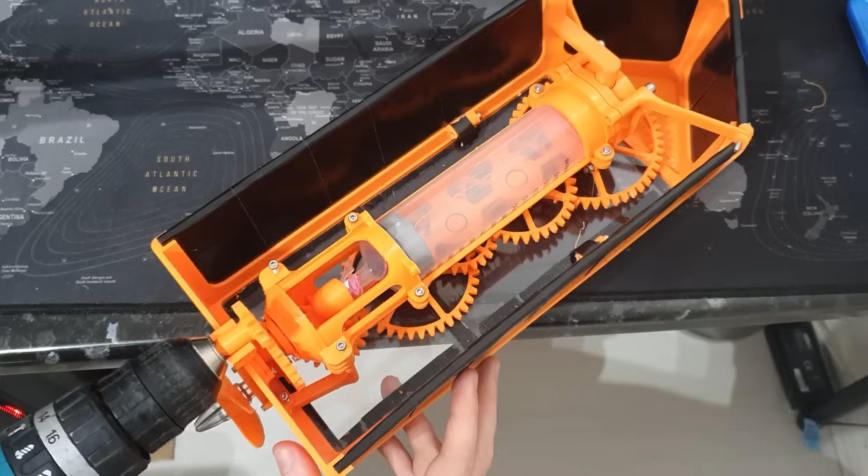It essentially worked by plugging the end of a syringe and winding back the piston inside the syringe using a gear mechanism, thus creating a vacuum. The difference in pressure between the inside of the syringe and the atmosphere results in an imbalance of forces on the piston, so atmospheric pressure forces the piston back into the syringe once you release the mechanism. This energy is then harnessed to spin a small propeller and push along a boat.

You may be thinking to yourself, atmospheric pressure isn't that high. How much force could it actually deliver? Imagine you laid flat on a table and a vacuum pump sucked you to the table. We can quickly work out how much force you would need to overcome. Force equals pressure times area. We know that atmospheric pressure is 1 atmosphere, so we just need a rough approximation of the surface area of the human body.

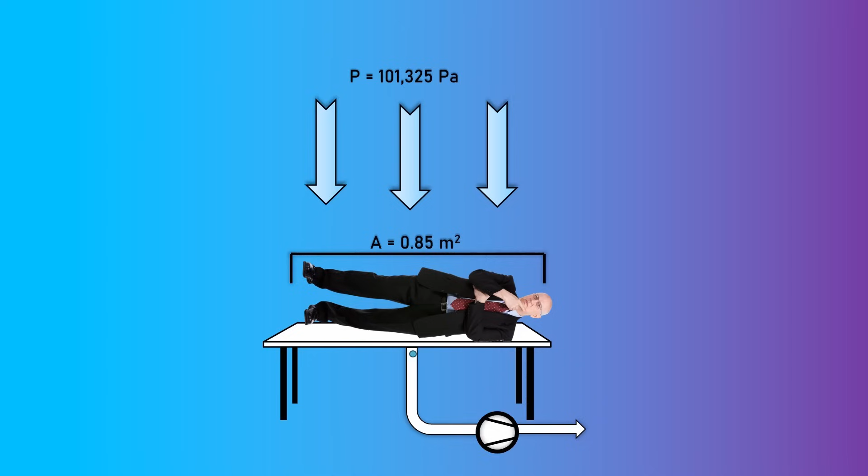So when we do the calculation, that gives us a force of roughly 86,126 newtons. Here on Earth, that would feel like 8,800 kilos, or the equivalent of roughly 6 hippos, or just one of your mother. Using these same principles, we can roughly work out how much force is required to pull back a piston of a certain diameter.

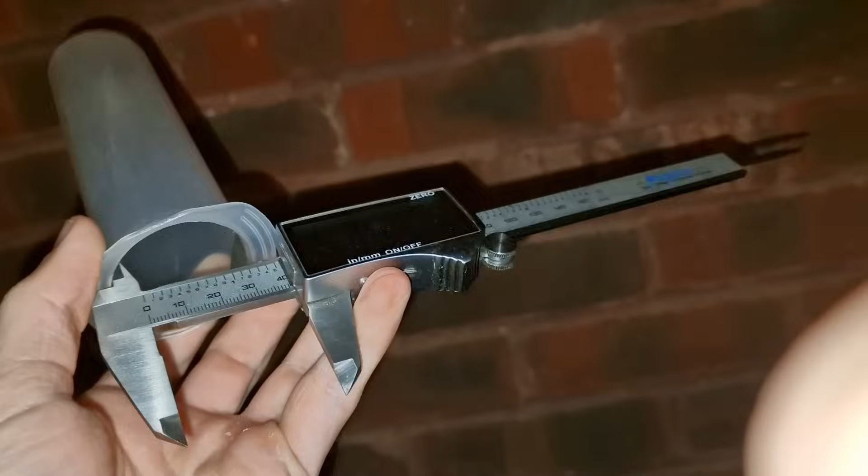This syringe has an internal diameter of roughly 4 centimeters, and therefore will require roughly 12.3 kilos of force in order to pull it back.

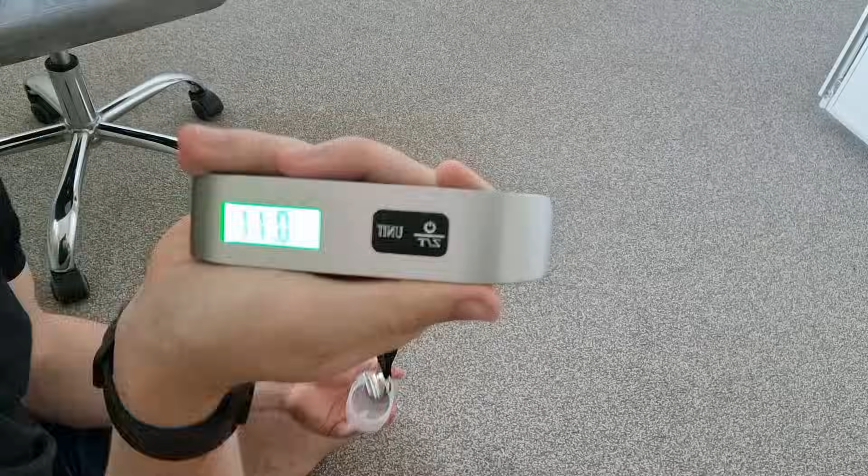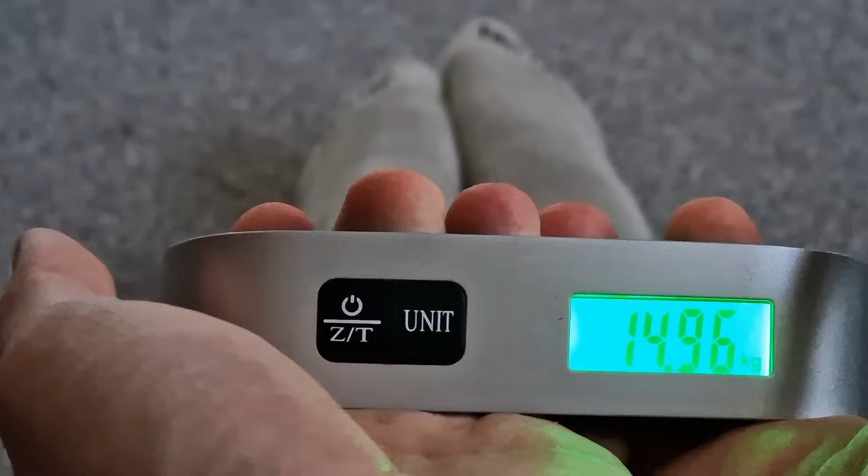I wanted to see how close this calculated value was to the actual value I'd see with the syringe, so I carried out a simple test using a luggage scale. And just to be on the safe side, I had Nala supervise. Safety is number one priority. So it comes out at just over 14 kilos, which isn't far off the calculated value. I think the main reason for the difference is the increased friction with the rubber seal on the syringe.

My first boat was powered by one of these syringes, which, in principle, did work. I think it's fair to say there were a few design flaws, and thankfully, a few of you were kind enough to point them out in the comments of the previous video. So, in this video, I'm hoping to address most of these concerns.

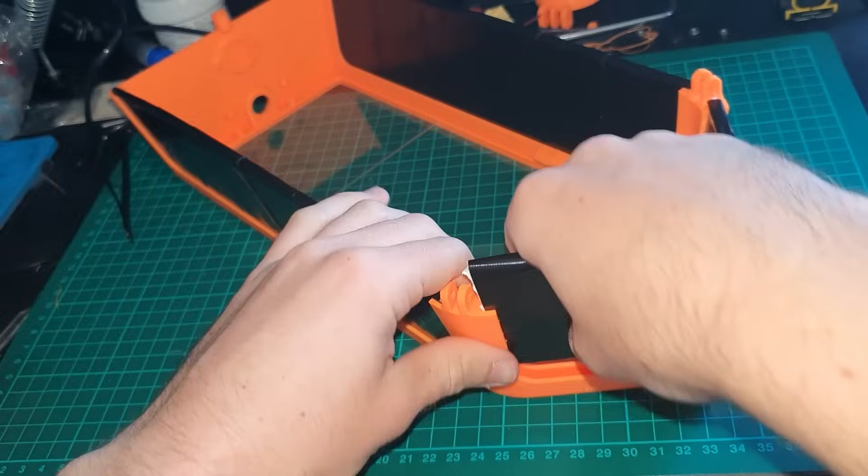The shape of the boat is not ideal. With this big, flat bottom, it's basically a barge, not a boat. So I've completely redesigned the hull so that it now actually looks like a boat.

Half of the propeller was out of the water, so the boat just spun in a circle. I've since learned this is called prop walk. This basically means the rotation of the propeller creates a paddle wheel effect, which causes the boat to turn to one side. The redesign of the boat hull was aimed to solve this problem, and I put the propeller shaft as low down in the hull as possible to make sure that it stays fully submerged in the water.

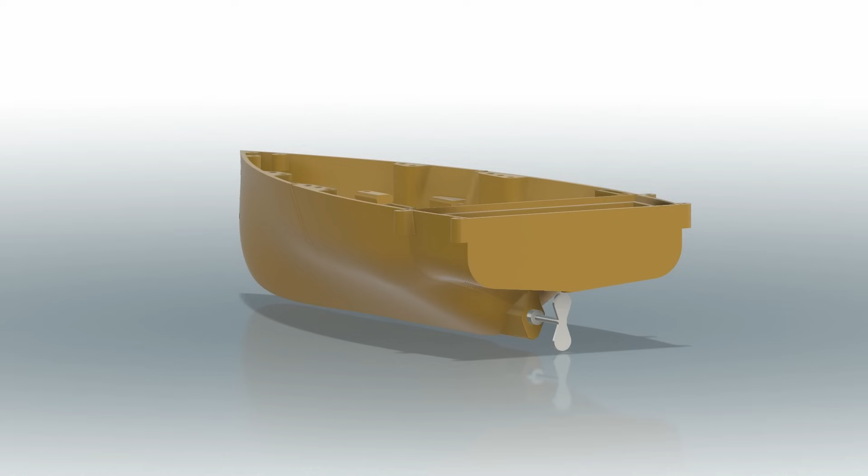There was one other thing that a few people mentioned. I'm just trying to remind myself of what it was. Install a rudder, put a rudder on, put a rudder on, put a rudder on it, put a rudder on it. So I'm going to put a rudder on it so that I can control the direction in which the boat is going.

Now, not having a rudder was an intentional decision, as I just wanted to make a simple boat without the complexities of having any electronics on it. And honestly, in my ignorance, I wasn't expecting it to basically be a merry-go-round.

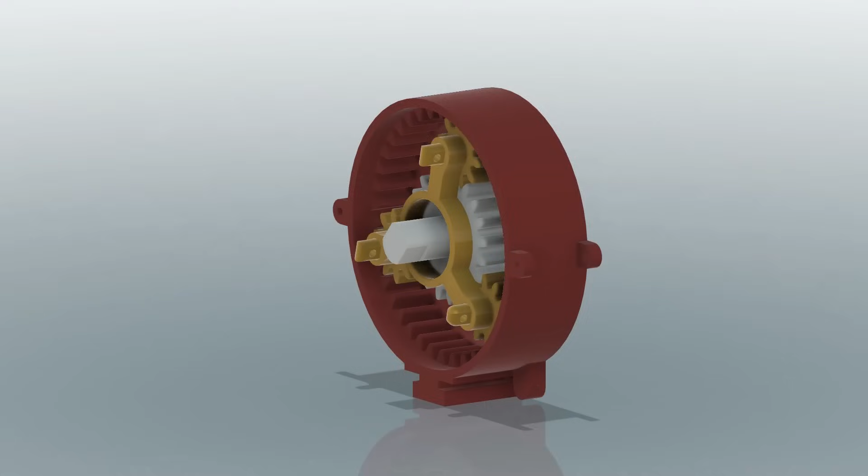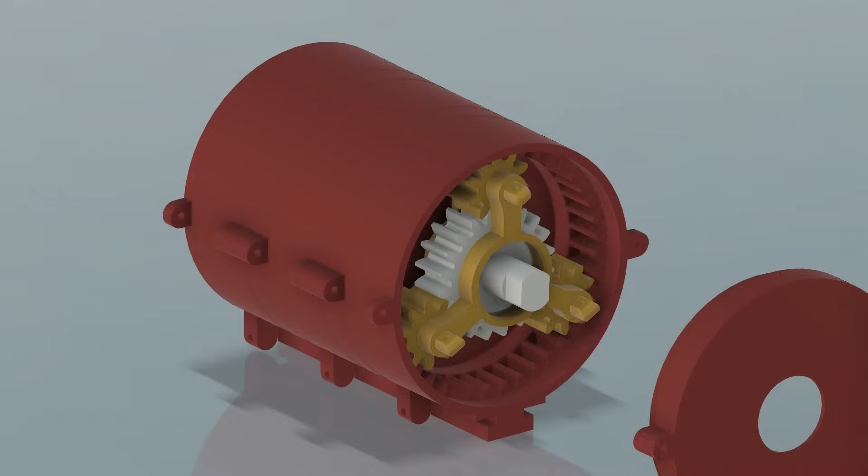I've made some other improvements too. At least, I think they are. I'm now using a planetary gearbox instead of whatever the hell you want to call this. The benefit of using this planetary gearbox system is that I've designed it in a modular fashion so that I can add or remove segments to change the gear ratio depending on if I want more power or more range. This mechanism is going to potentially have more torque than the last one, so I'm hoping the extra tooth contact area is going to reduce the chance of something breaking. It probably won't, but we'll see.

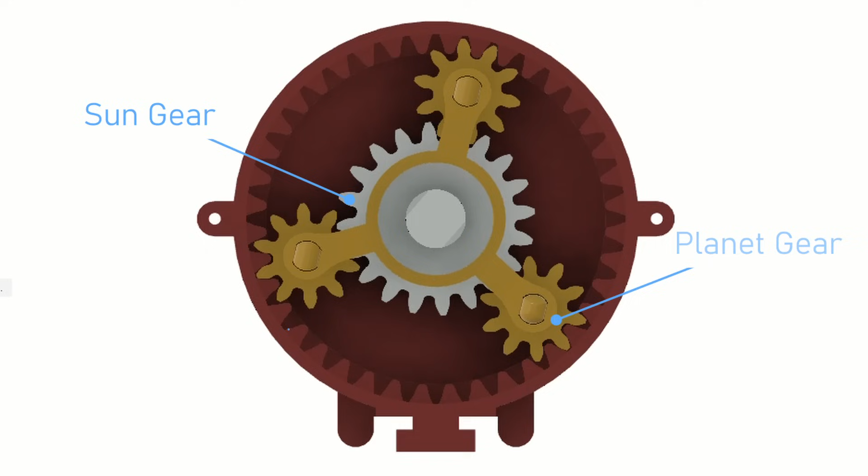In simple terms, a planetary gearbox is made up of a sun gear, planet gears, and a ring gear. The planet gears revolve around the central sun gear, with each of the planet gears connected by a carrier, and the outer ring gear is fixed in place. The math behind determining the gear ratio is slightly more complex than for standard spur gears, but basically you can just use this formula. In this gearbox, every time the planetary gear carrier rotates 1 time, the sun gear will rotate 3 times, giving it a gear ratio of 1:3.

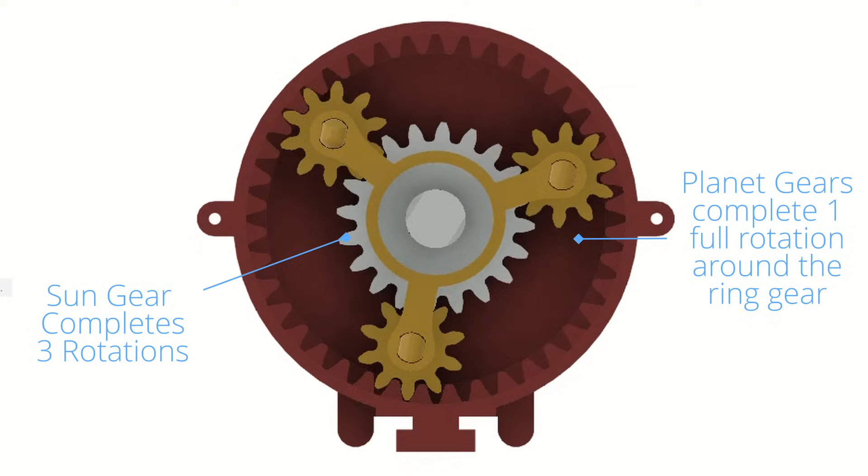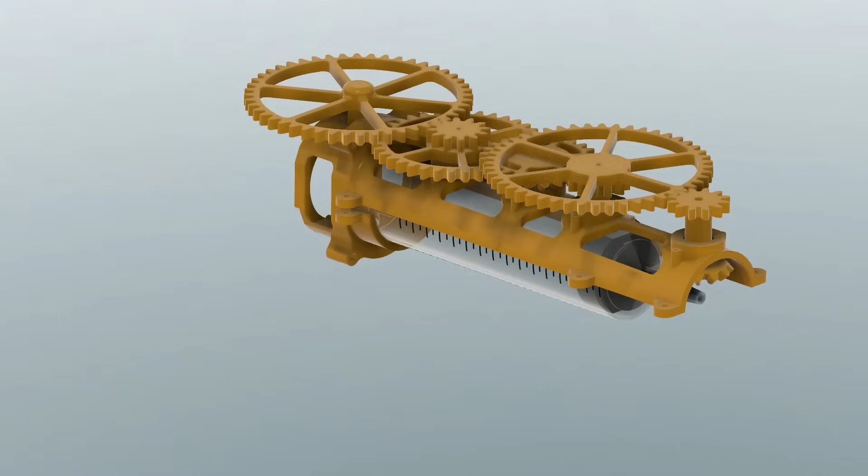By connecting these together in series, I can get quite a large gear ratio pretty quickly, meaning for a small movement of the piston, I get a lot of rotation at the propeller, hopefully giving the boat good range. Though I can see a potential issue from increased friction due to the greater gear contact area. There also may be an issue with the center of mass being too high on the boat, as due to the size of the planetary gearbox, I had to mount it at the top.

Now, my favourite part of the process: spending an entire week printing and troubleshooting issues with my design.

I printed off the planetary gear set first, just to see if it all actually worked as intended. This took quite a while to do, because some of the parts are really small and fiddly, so it's quite hard to get together, but eventually I got all 4 modules together.

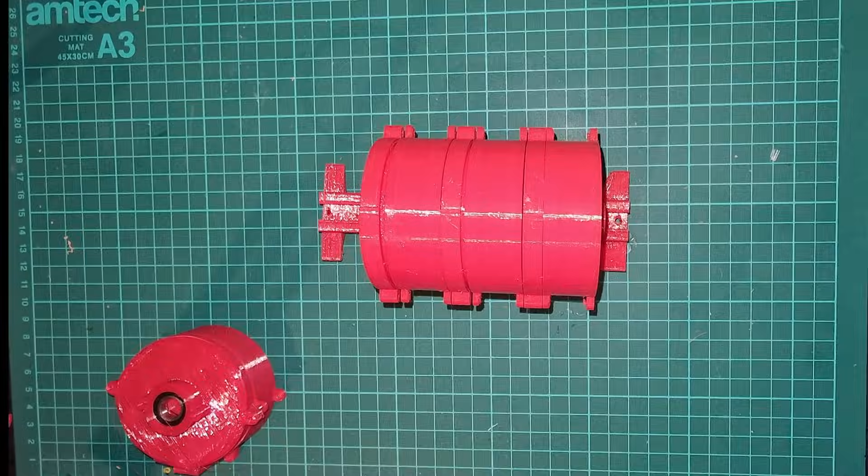And it didn't work. So I took one of the modules off and tried again, and this time it seemed to work fine and felt pretty smooth. So I thought I would just try and make it work with 3 modules, as I could already see friction was becoming an issue, and I haven't even added on the bevel gear or the belt yet.

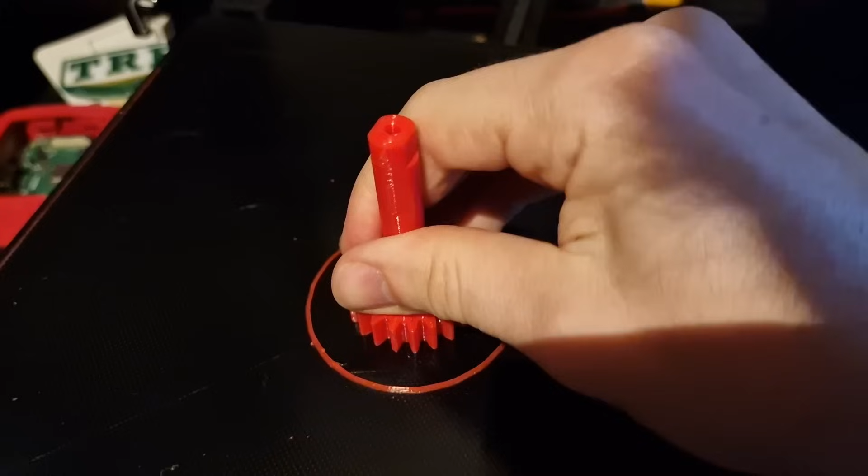To make the gear fit with just 3 modules, I printed an extra long shaft, which would extend to where the belt was supposed to connect.

The next part to print was the gear and syringe rail support. This part needs to be able to withstand the force being exerted on the piston as it's being pushed down the syringe, and it also needs to connect the motion of the 2 syringes together into a single output.

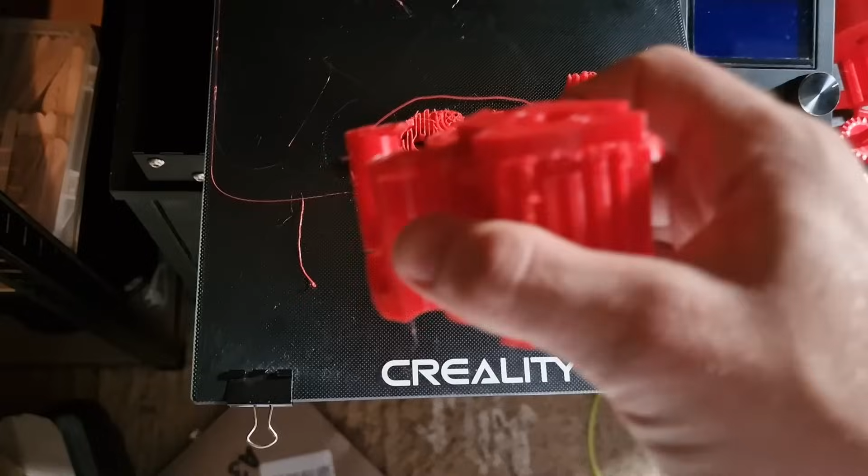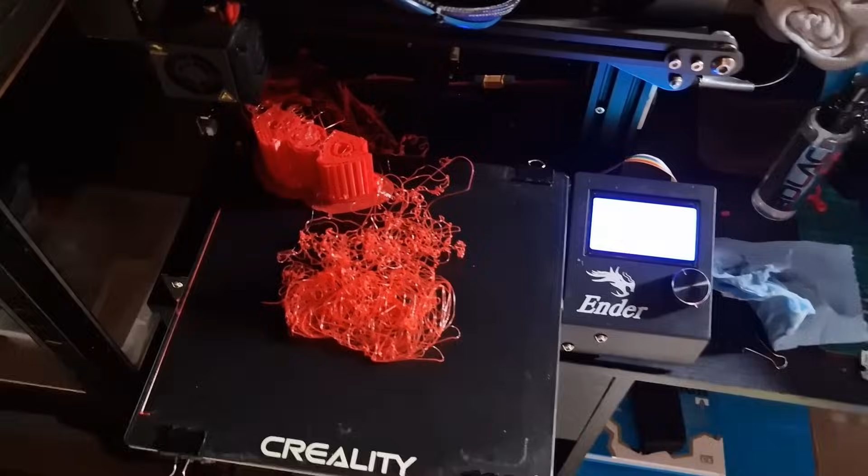This piece was a nightmare to print. The first time I snapped it pulling off the bed, and the next time it caused a clog in the printer nozzle and the Bowden tube. I then replaced the nozzle and the Bowden tube, and it failed again. So I don't know whether it was something wrong with the model or the filament, but regardless, I was fed up with this red PETG filament.

So I bought some yellow filament instead, and this worked beautifully the first time. The next thing to print is the boat hull, and this is probably the biggest thing I've had to print on my 3D printer so far. As I only have a measly Ender 3, I had to split the model into 3 parts.

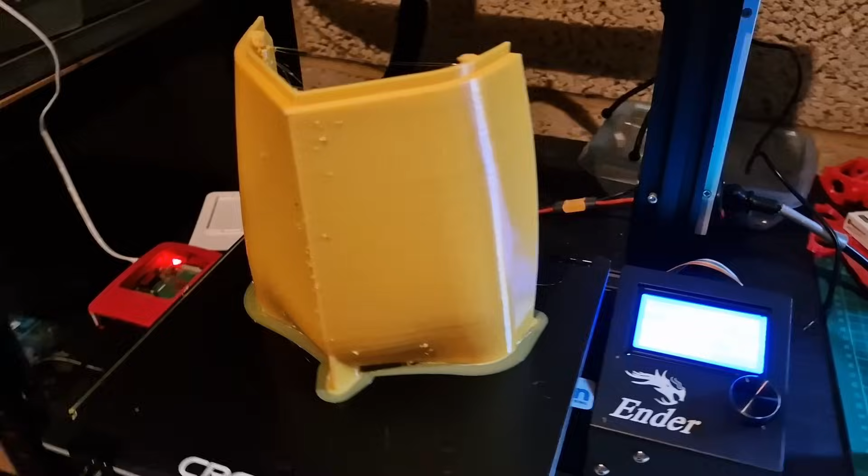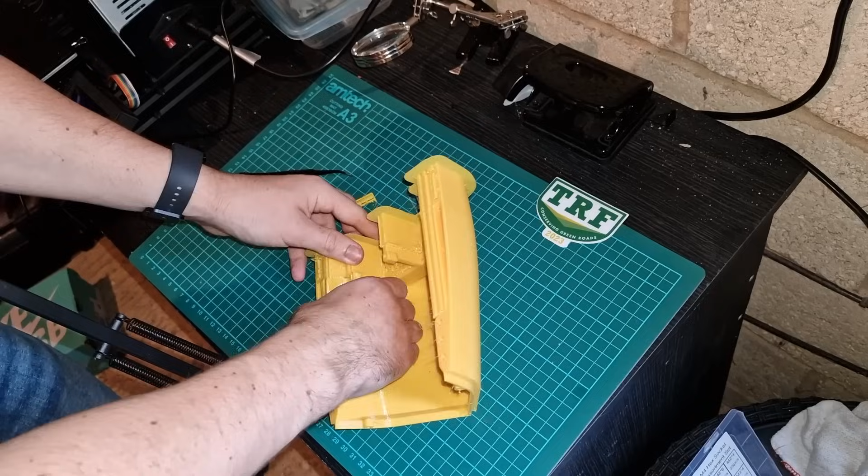I printed the largest middle piece first, and honestly, the quality of the print was pretty poor. There were some pretty large gaps in the outer shell, there was lots of stringing, zits, blobs. I had just changed to a new filament and increased the nozzle size, and didn't do any calibration test. So I only really have myself to blame.

But as I'd pretty much used up 1/3 of the filament with this one print, I couldn't bring myself to throw it away. The dimensions were actually pretty good, and all the pieces fitted as I'd hoped. Except for this part, which required some mild destruction as I had modelled it wrong.

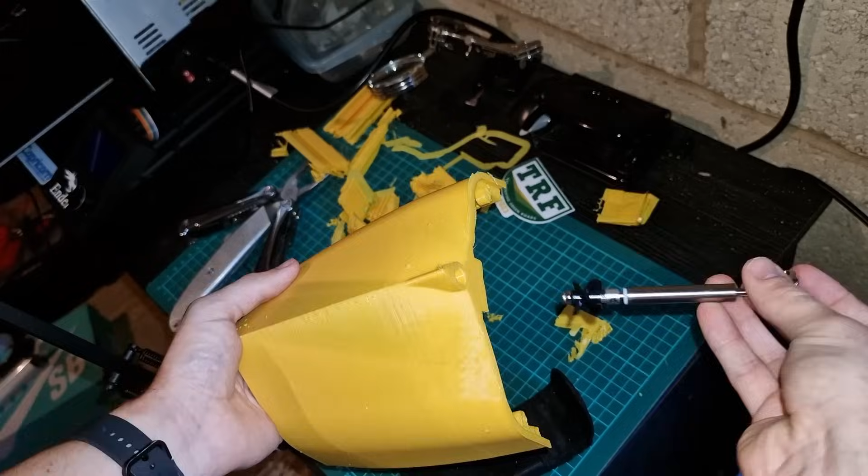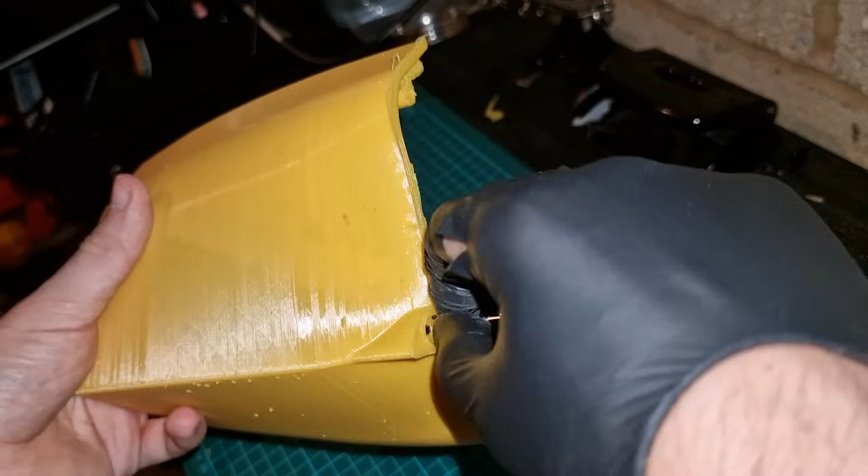The hardest part to fit in was the propeller, because it was a friction fit, which needed to be very tight to prevent any water from coming in. To make sure it fit tightly, I slightly undersized the hole and gradually sanded away at the inside until I felt like it would fit snugly. So then I just had to carefully slide in the propeller and make sure I don't damage anything.

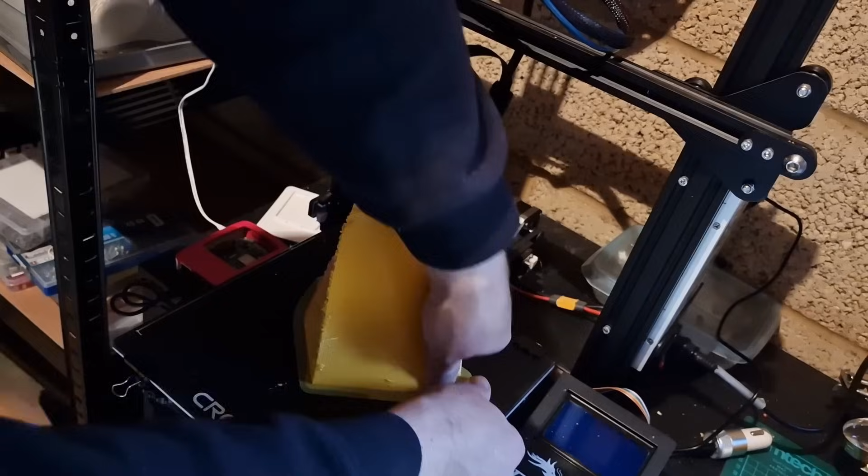Then I printed the front and rear sections, and they were just as bad as the middle section. But anyway, I hoped the post-processing would fix these issues, so I just carried on.

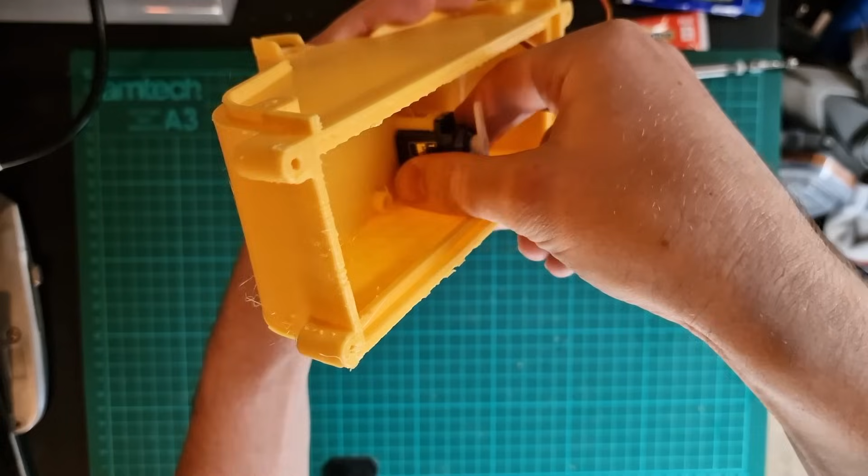Before gluing all the pieces together, I tested to see if the mini servo would fit into the slot that's printed in the hull, and also that the RC controller, servo and receiver were all working correctly. It all seemed to work fine, so then I just had to glue all 3 sections of the hull together using the cheapest epoxy resin glue I could find on Amazon.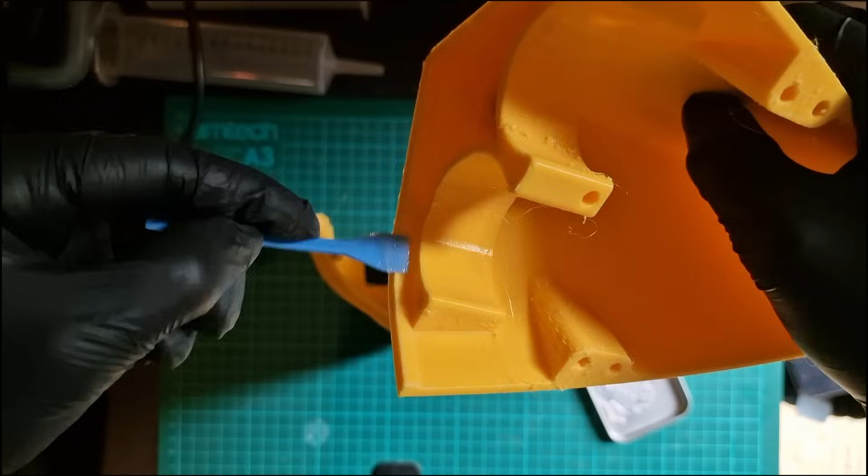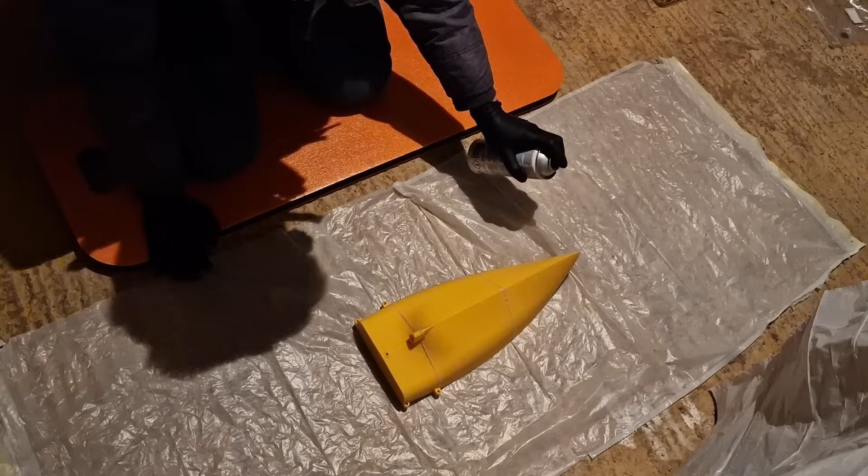To waterproof the hull, I used a sealant spray, and I applied multiple coats due to the complete lack of confidence I had in the watertightness of the hull.

Once that was done, it was time to start putting together all the moving parts. The motion of the planetary gears is transferred as low down as possible into the hull via a belt drive, where it attaches to some brass tubing and then attaches to the propeller.

The problem with this is that the connector for the belt drive and for the propeller are 2 different diameters, so I can't just use a single brass tube as it doesn't fit. So to deal with this, I utilised my horrendous soldering skills to solder together 2 brass tubes of different diameter.

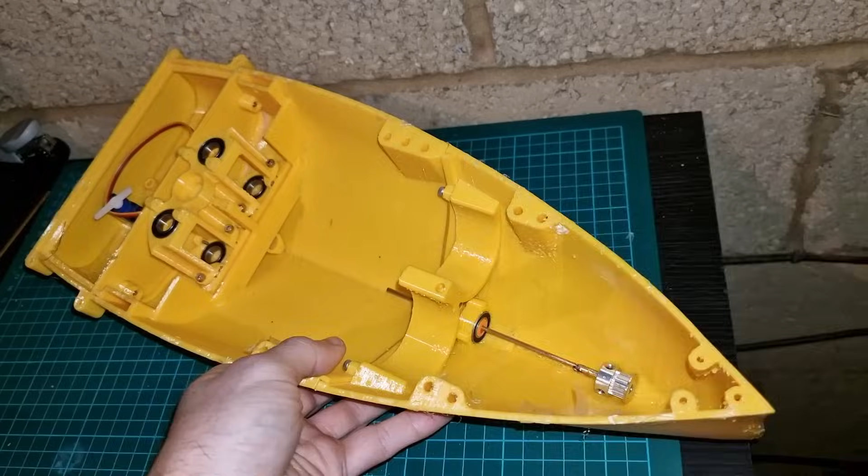After cooling the burn on my thumb for about half an hour, I went back and finished the assembly, being careful not to damage the delicate propeller when fitting it to the hull.

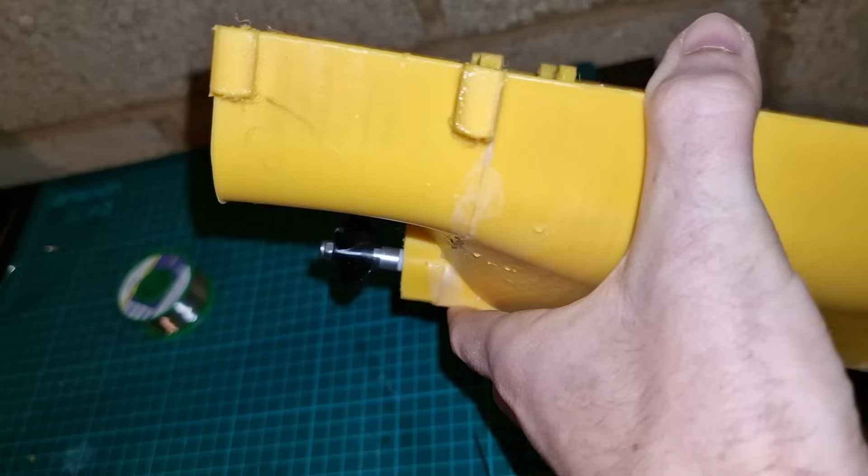The brass tube connects to the belt pulley and the propeller by a set screw, and once I'd secured both ends, I could quite freely spin the belt drive and the propeller mechanism. Though it was slightly off centre due to my bad soldering, this was compensated for by the joint on the propeller, so I wasn't too concerned about this.

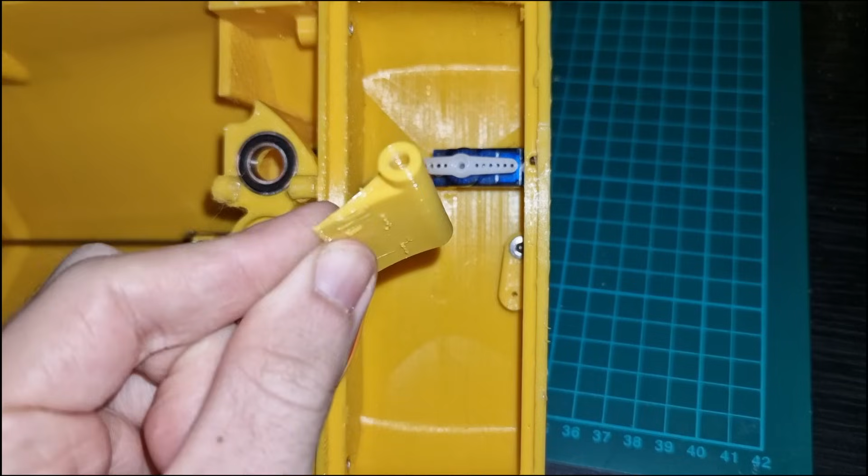Next was the rudder assembly, which looked great in CAD, but once I tried to fit it to the boat, I quickly realised this wasn't actually going to work. So I immediately destroyed the evidence.

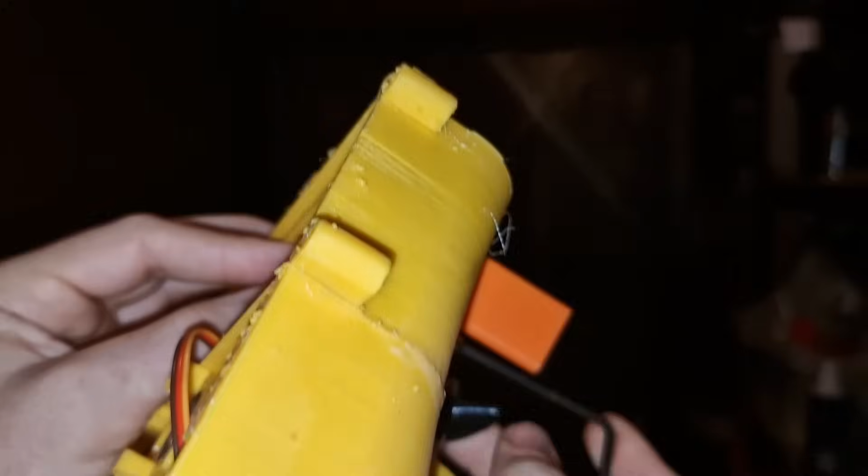Then I just slightly redesigned the rudder assembly so that I could actually install it on the boat. And then all that was left to do was to connect up the servo, some power, and see if it all worked.

Whoa, we have success, baby! Let's go!

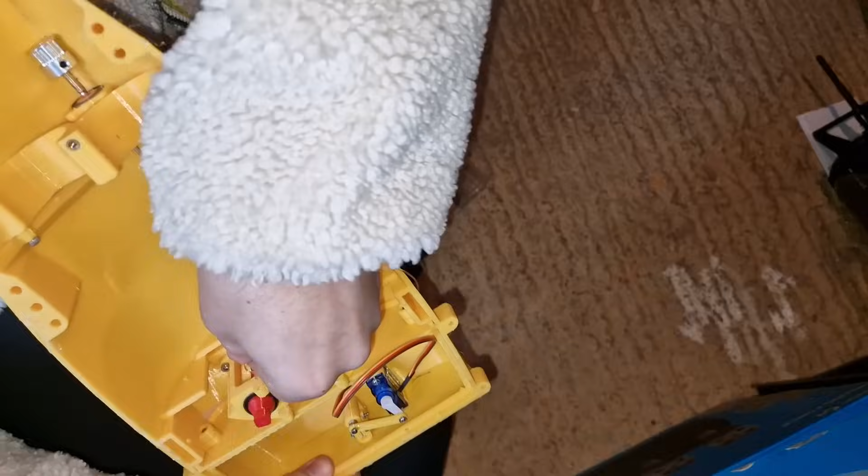Then came possibly one of the most painful steps in this entire build process, which is trying to thread this fishing line through this 2mm hole while it's attached to the boat. Now you're probably thinking, why didn't you just take out this part so that you had more room to work with when trying to thread the fishing line through the hole? And that's a fantastic question I don't have an answer to.

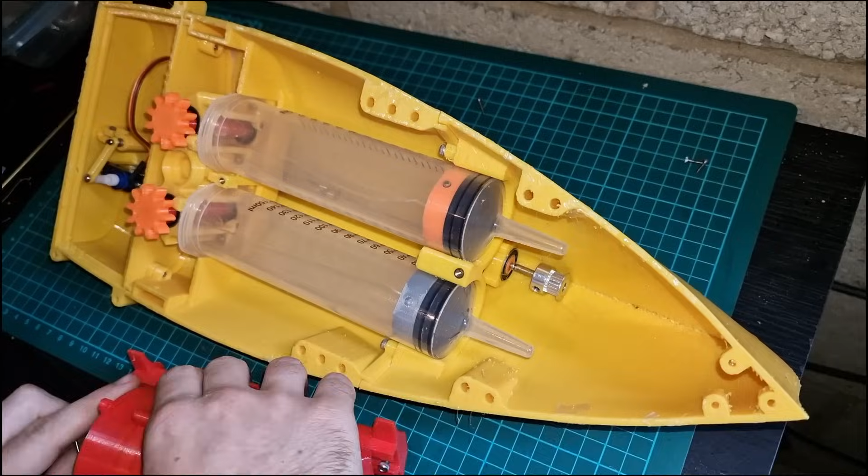The syringes then slot into the gaps in the hull, and the ring gear mount is placed on top of them and secured at either end with 2 screws. The belt then has to be cut to size, so I just eyeball the measurement and use this technique I found on YouTube of cutting up some cloth and applying it to the back of the belt with copious amounts of superglue to join the 2 halves together.

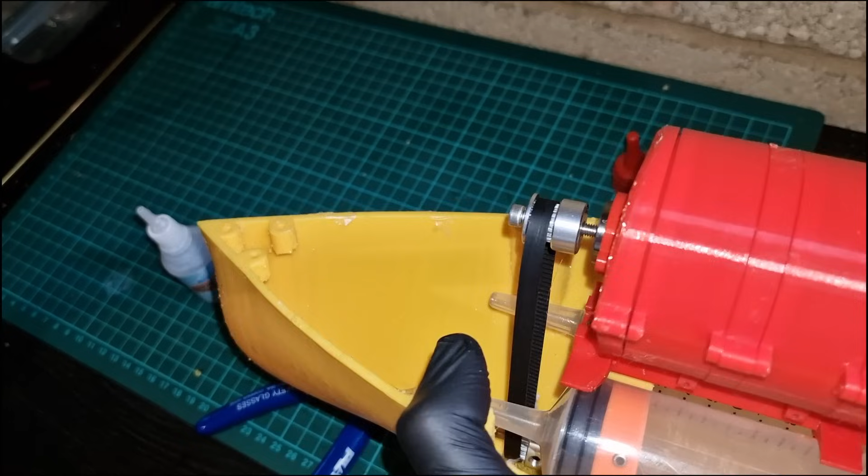As you can see, this worked brilliantly. The final piece of the puzzle was to install the bevel gears.

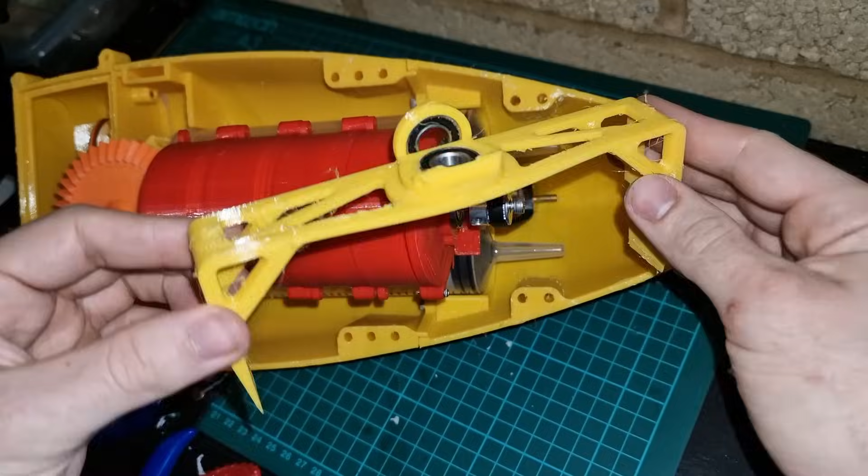I then noticed I would need to provide some additional support via another bearing above the large bevel gear as it was very wobbly. So I designed this bearing mount and connected it to the hull using these 2 slots, which I built into the model in anticipation that I would need to add things later because it probably wouldn't work.

And with that, the boat was finished, so I showed it to the boss, who approved of it with a sniff and a slap.

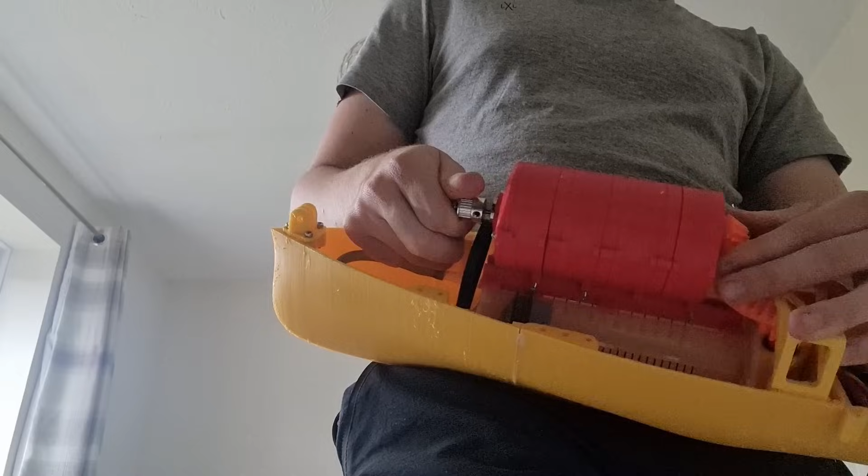So I filled the bath and started to wind up the mechanism, and almost immediately, it snapped.

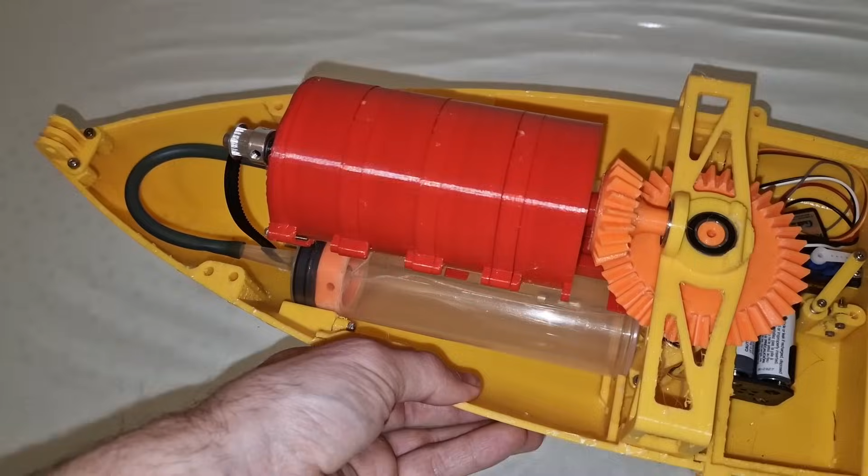This is why you should test things along the way, and not when you've finished. As I had already waterproofed the boat, I thought I may as well see if it even floats before I pump even more time into this design.

Luckily, it did float, so then I just needed to deal with the design issues.

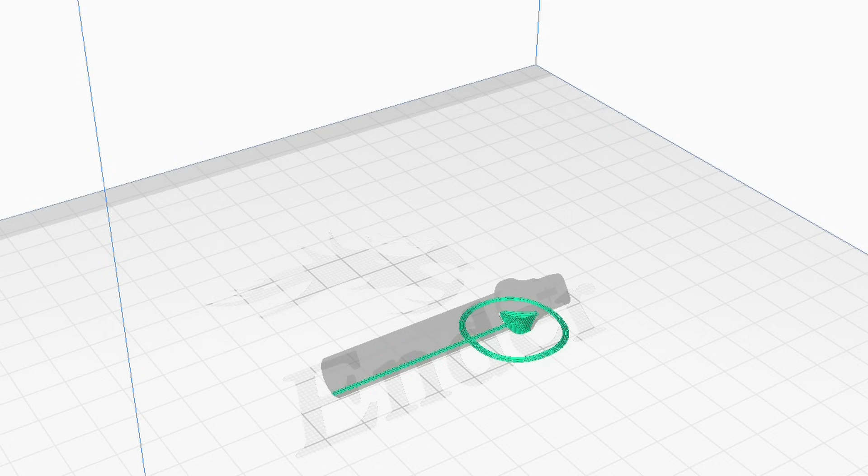The part snapped because it was printed in a vertical orientation, and due to the way force is applied to this part, the strength is totally reliant on the bond strength between the different layers. So to easily overcome this issue, I can just print the part in a horizontal orientation.

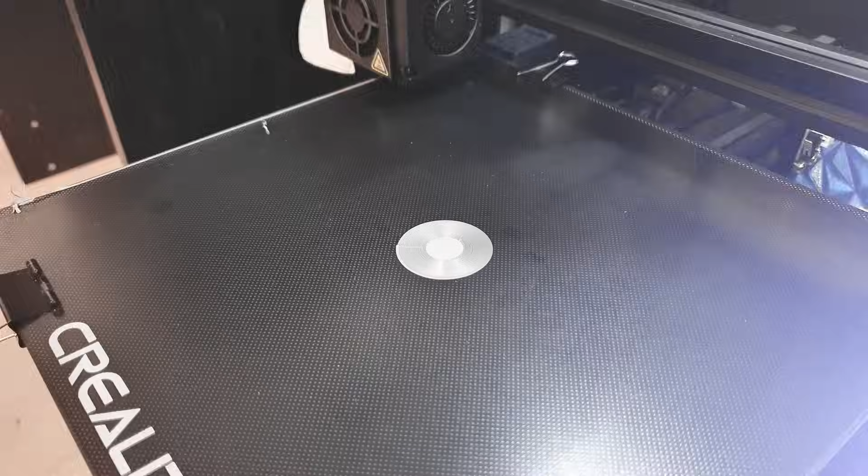Another problem is the significant amount of friction in the ring gear system. My printer is an Ender 3, which is an FDM printer, which basically deposits layer after layer of melted plastic on top of each other to build up a part.

Another type of printer is known as SLA, or stereolithography. These printers use a photosensitive liquid resin and use UV light to cure the resin layer by layer to create an object. One of the benefits of a resin printer is that it can have a much smoother surface and higher dimensional accuracy compared to an FDM printer, so I thought it would benefit the gear train to help reduce friction.

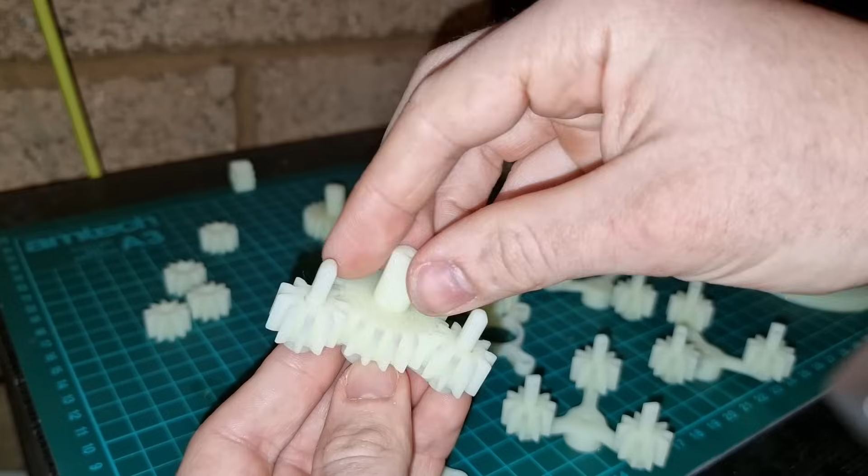There's also a clear improvement in the amount of friction in the gears too, as I was able to run this one with all 4 modules connected together, which I couldn't do with the gears that I'd printed. It's also pretty cool that the prints are slightly transparent, so you can see the individual gears inside moving.

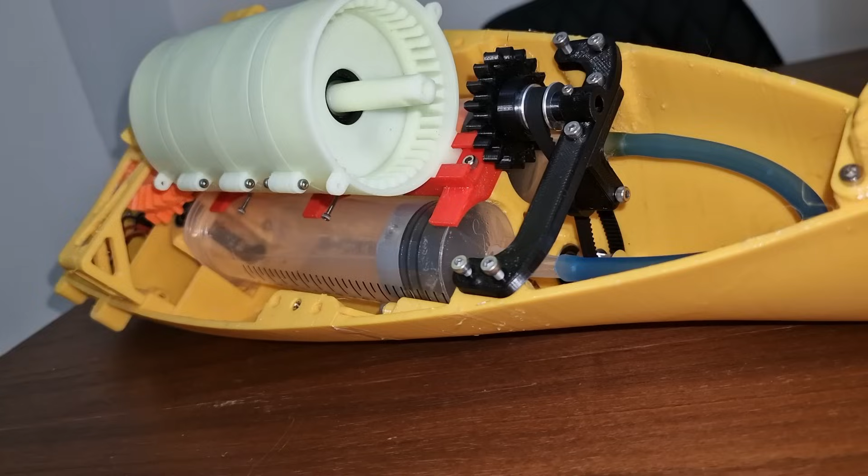Though it does work with 4 gears in series, to keep friction to a minimum, I still decided to stick with 3 modules in series as a first attempt, just to try and get it to work.

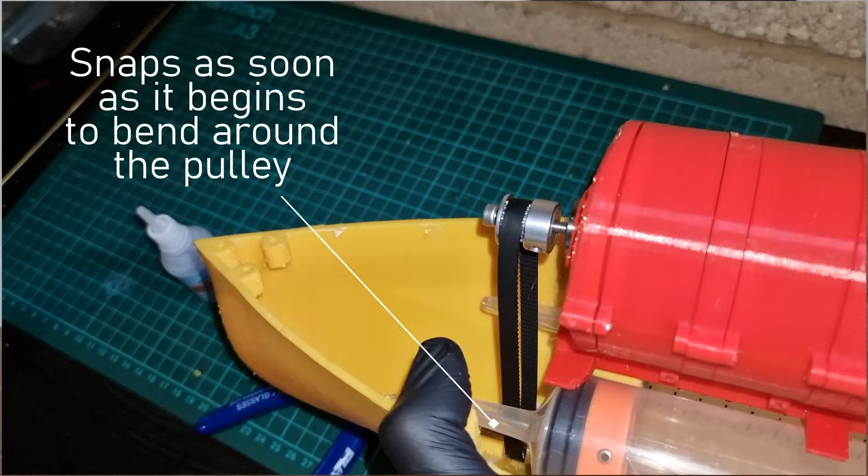I've also had to go through numerous iterations on the front here. What was once just a simple pulley system has now had to be turned into a gear and pulley system. The reason for this change is that the space between here and here does not fit any standard belt sizes. And where I've shown previously that I've glued the belt together, this really does not work in this kind of application. Any sort of bend on that joint and it just wants to snap.

So we can see with this system now that we actually have very little friction here, and I can actually spin it from the main cog, which is something I wasn't able to do before. Here's the moment of truth. Will it survive the wind-up?

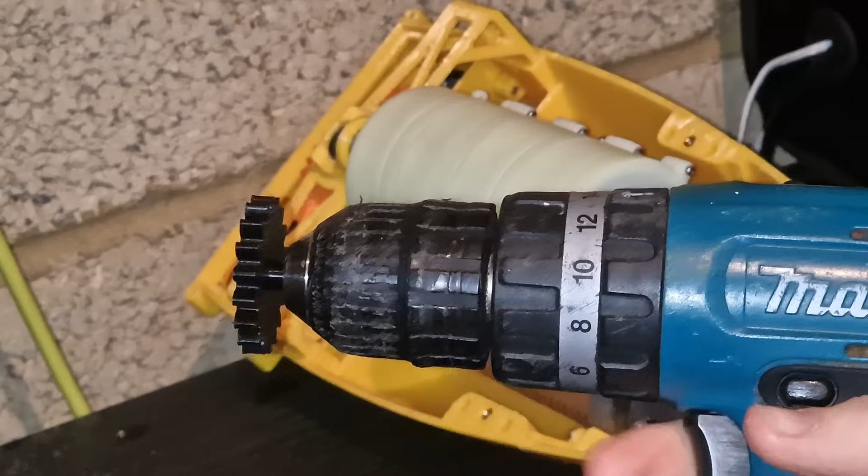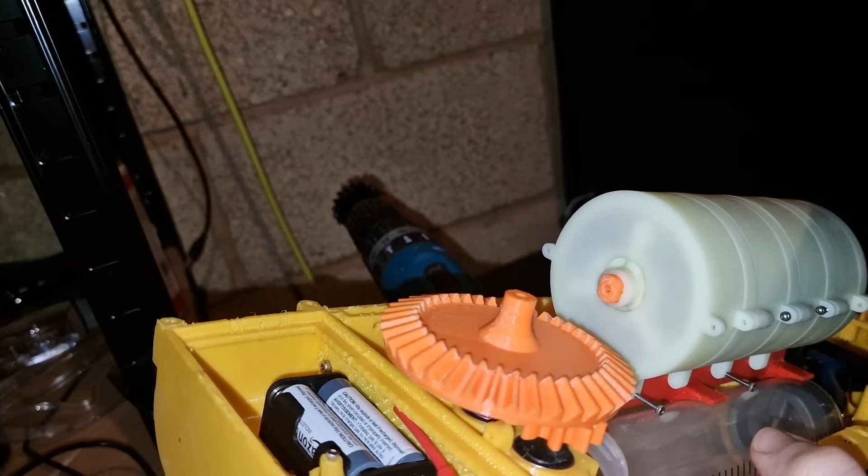Shit. Something has broke somewhere. It's no longer spinning the front cog. Found the problem, you see that? That was connected to this. It's not supposed to do that.

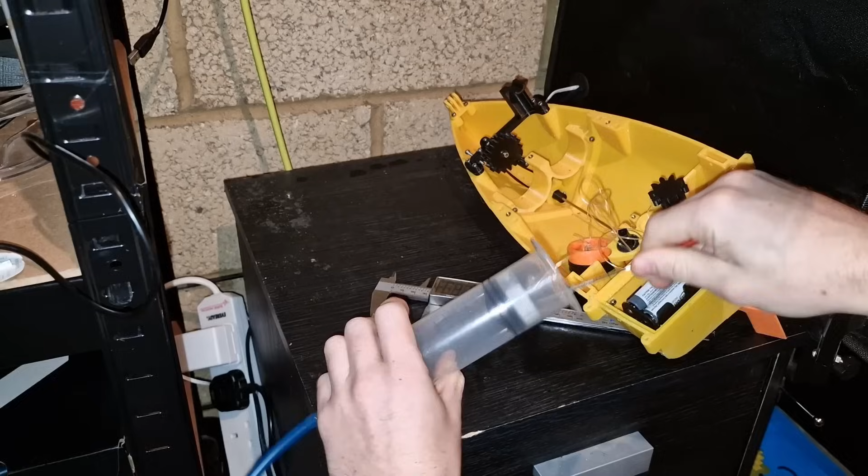As I was taking apart the gear assembly to reinstall another bevel gear, I tried winding back the mechanism on its own and noticed that one of the pistons was moving up the syringe slower than the other one. So then I tried both pistons in the same syringe to see if it was an issue with the 3D printed piston. But there actually seemed to be something wrong with the syringe itself, as both of the 3D printed pistons were getting stuck at the same place in the syringe.

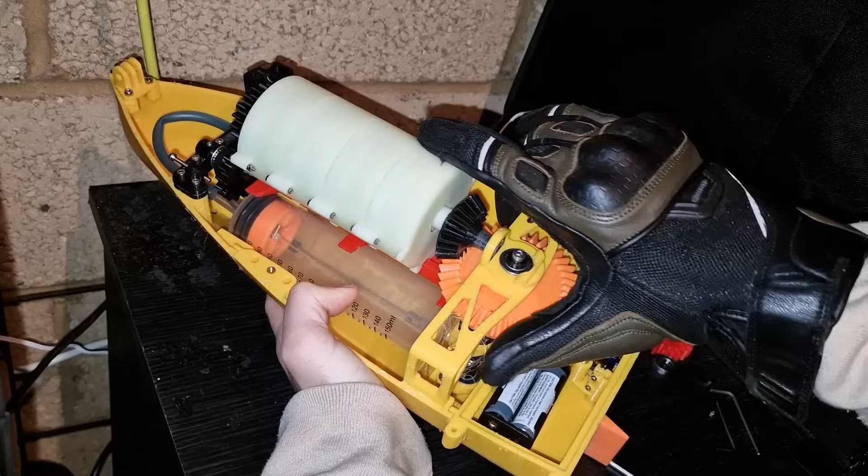But in the other syringe, both of the pistons would move freely up and down. Luckily I had another syringe, so I just swapped out the broken one, and it immediately worked much better, with both pistons moving at the same rate. So then I just had to put the gear train and bevel gears back on and try again. I can actually move the bevel gear relatively easily, so I think it has a pretty good chance of working this time.

About a quarter of the way up. I'm gonna stop here. And then, absolutely nothing. Come on! And that is...

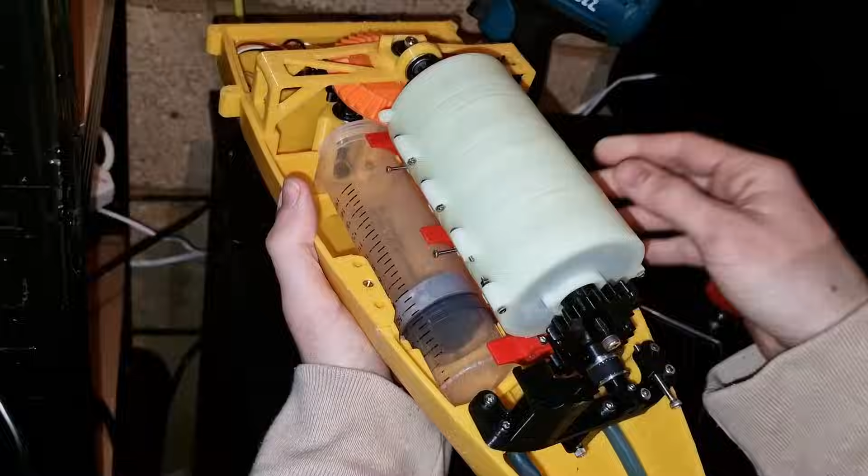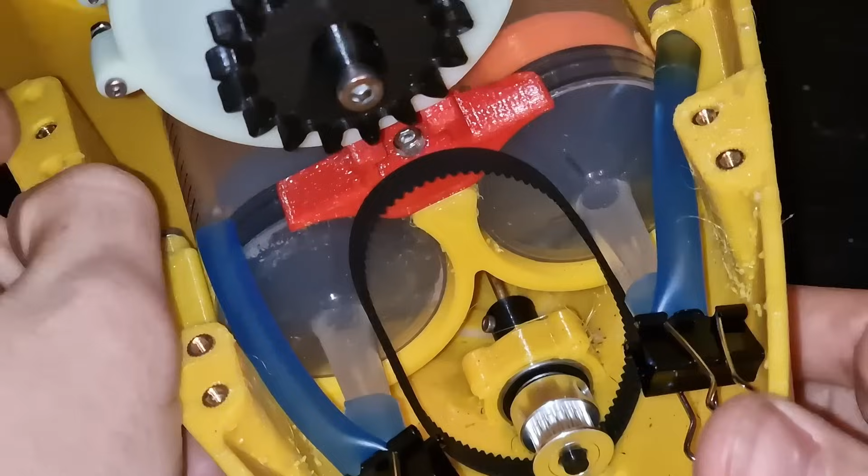So I think the issue had something to do with the fact that the vacuum space here was linked. Basically all I've done here is cut these bits of tubing shorter and isolated each syringe. Setting it up like this actually makes it easier to recharge it as well, so I don't know why I didn't do this in the first place.

The next test I did outside because Nala wanted to see the progress I'd made. After winding up the mechanism, there was nothing that snapped, so that was good. When I let go, nothing happened.

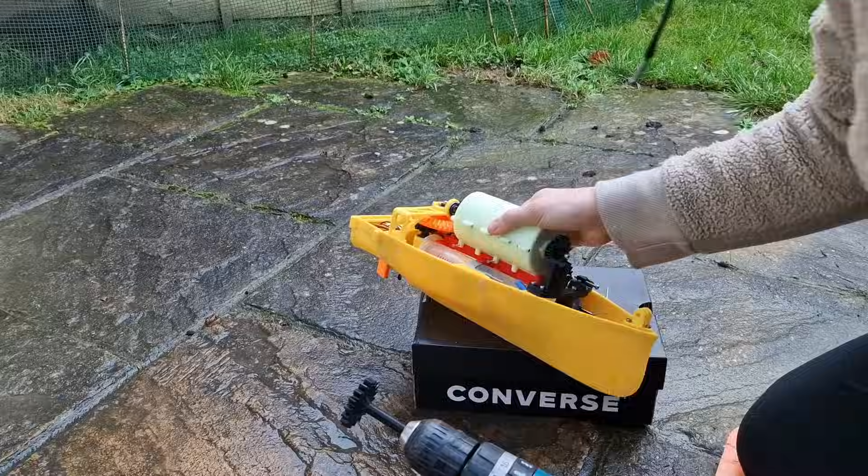Again, you can't really see very well from this angle, but instead of the larger bevel gear spinning the smaller gear, it was just pushing it off to the side, so it was getting stuck. I thought maybe they were installed too close together, so I just pulled it back slightly, and then this happened.

Balls. I put it together again, and actually got some motion out of it, which excited Nala.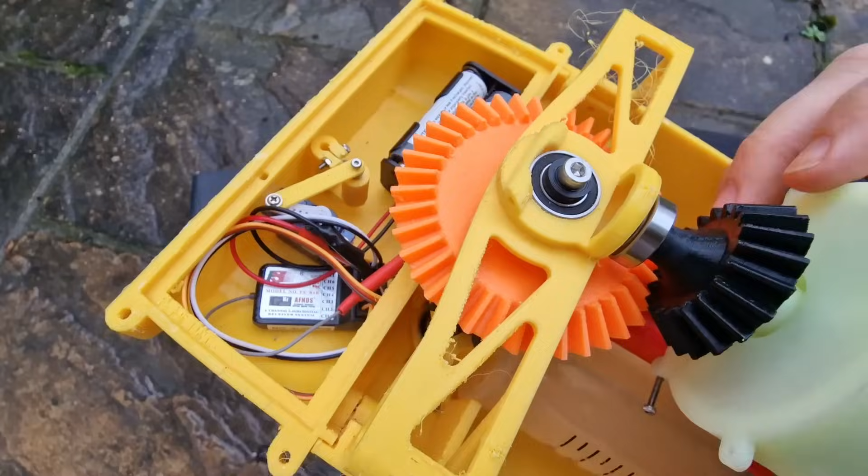But it wasn't enough. So then I thought, maybe it's an issue with the bevel gears, because I did have to sand them slightly, and I also designed them manually, so chances are there was probably something wrong with my design. I then thought back to my previous boat, which had bevel gears that seemed to work perfectly fine. So I made some slight modifications to the models and then added them to this boat.

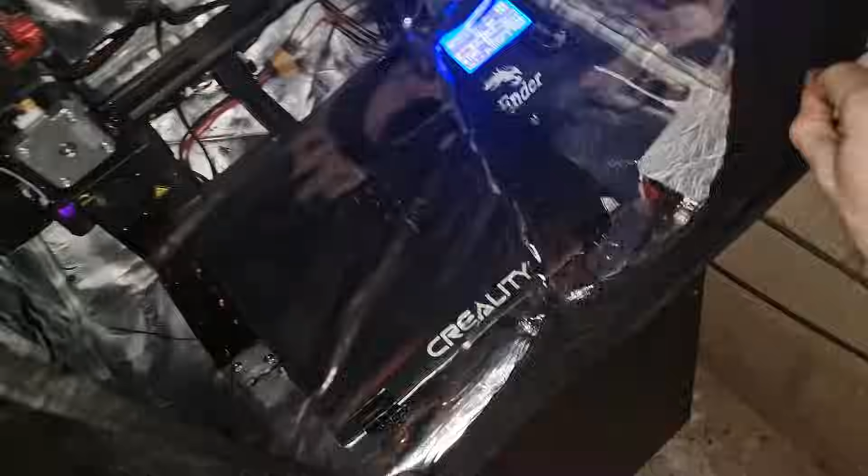If I could brace it, maybe, and stop it moving side to side, maybe it would be more inclined to spin.

This is the easiest I've had it move so far. Looking good.

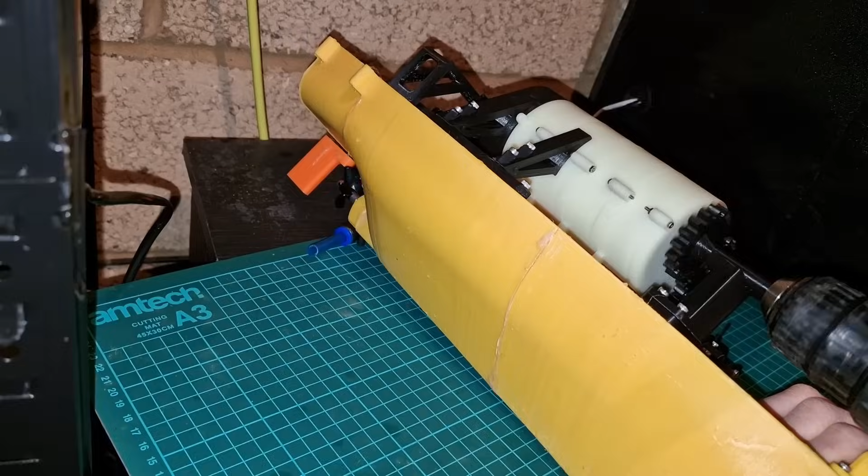No! God! No! That's never a good sign. Let's just keep going until something breaks.

I carried on winding it up despite the clicking to figure out what was going on. That doesn't sound good. Doesn't sound good.

If you look closely, you can see that the bracket supporting the bevel gear is being pushed backwards, which is causing the gears to skip. In addition to this, the whole gear train was still being pushed off to the side instead of rotating.

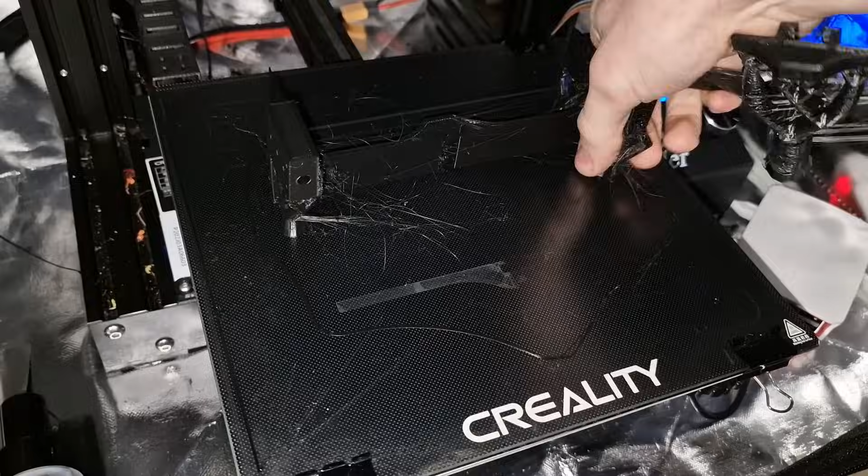To try and fix this, I printed a whole new gear mount to try and hold it in place better. However, I forgot about these little screw slots which were stopping me moving the gears in and out, so I had to cut them off, which was actually pretty violent.

Despite this change, the gears were still skipping, and honestly, at this point, I was pretty fed up with this project, so I was ready to give up and call it a failure. But a few weeks later, I had one more idea on how I could potentially save this project.

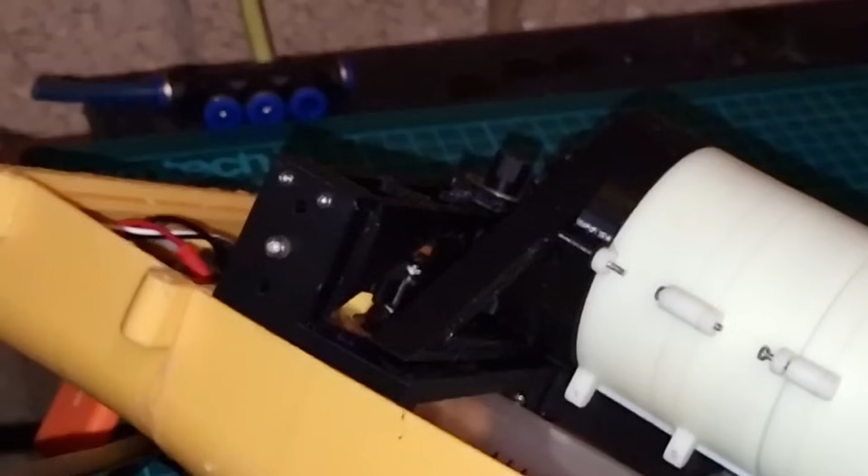Looking back at the footage, I noticed the ring gear was being pushed upwards, and I realized this was because I was lazy and didn't put the screw in here, as I assumed the mount was held in place with the other screws. Locking this down would stop the mount moving upwards and, hopefully, stop the gear skipping.

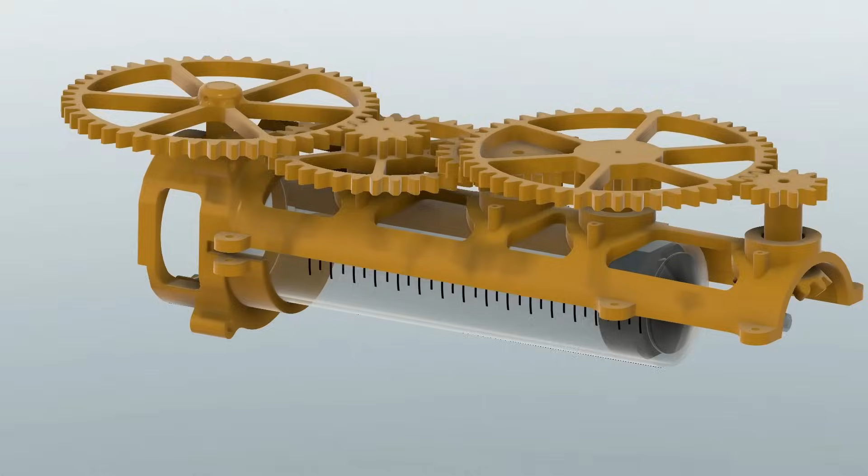Another issue was that the very first planetary gear's connection to the bevel gear was very shallow, and I think this was allowing it to shift around and not stay aligned. Another problem was with the actual bevel gears themselves. They were awful. I think they only worked on the original boat because there was very little torque being delivered through them, as they were right at the end of the gear train.

On this boat, the bevel gears are experiencing the maximum torque that this boat can deliver, so the alignment has to be much better. In the end, I just bought some machine bevel gears because I was sick of trying to design and print mediocre bevel gears from scratch, which just weren't working in this design.

I didn't design the bearing mount with this bevel gear in mind, but by absolute blind luck, the bearing fits perfectly within the cutout in the center of the bevel gear. It's beautiful! It wasn't all perfect though, as I had to make some minor modifications to the underside of the bearing mount, since the bevel gear was sticking into it and wouldn't rotate freely.

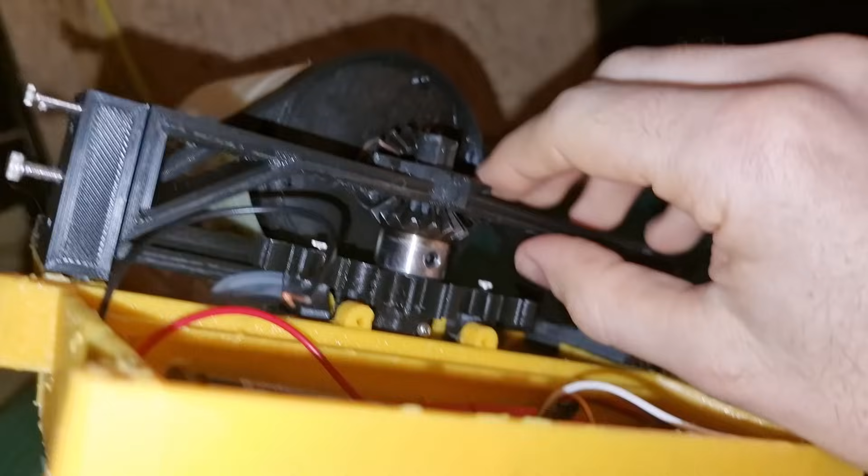After reinstalling the bearing mount, I tested it out by hand, and this was definitely the smoothest it had been so far. So once again, with my hope restored, I wound it up with my drill, let it go, and was once again left disappointed by this piece of junk.

I noticed again that the bearing mount was being pushed backwards, so I added these supports which held the bearing mount in place by bracing it against the gear train.

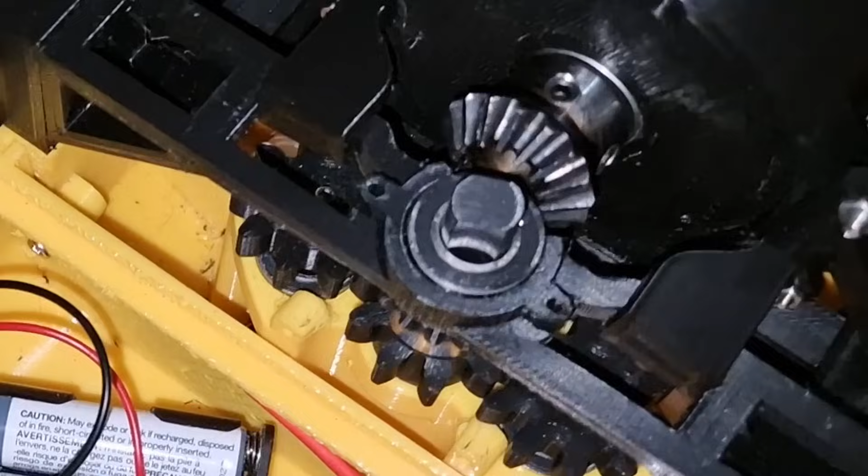After trying to wind up the mechanism again, there was a lot of creaking and cracking, and then I noticed this. The bevel gear had been bent sideways by the force, and when I took it apart, I found this part had been completely twisted by the force, but somehow had not snapped.

So I made some adjustments to the model to increase the strength. I then found the reason for the clicking, which was the bevel gear picking up the bearing as it was rotating. Not such a perfect fit after all.

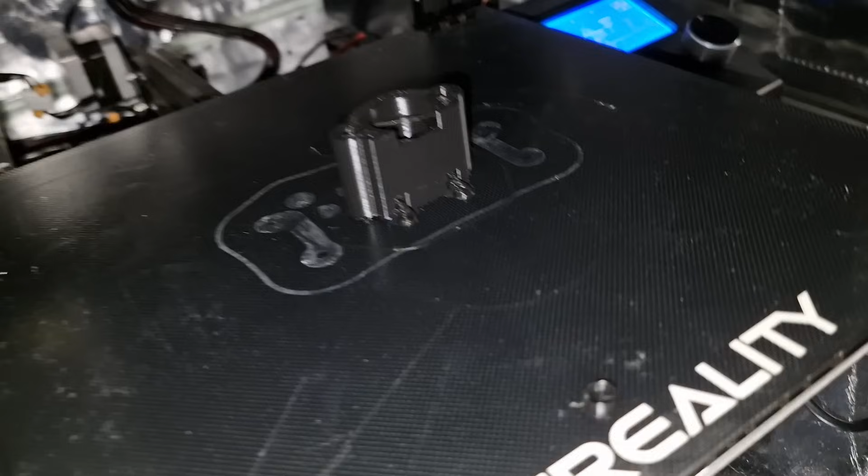So I printed this add-on piece which moved the bearing higher up and stopped it from contacting the bevel gear. And this time, it actually worked pretty well when I wound it up, and I thought it was ready for a bath test again.

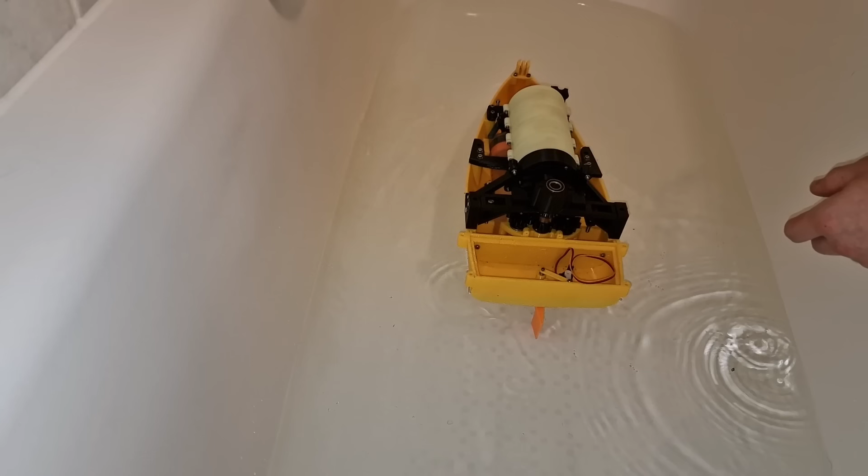Now this test was not very confidence inspiring at all. One, because it was almost sinking, and two, because it barely moved because of how heavy it was. But anyway, I took it to a nearby pond for a test because why not?

The test was an absolute disaster. I was pretty disappointed, but at the same time, it was pretty funny how pathetic it looked.

I am under the water. Please help me.

I then gave up on trying to make this boat work for like a week before I thought of one or two ideas on how I could potentially make it work.

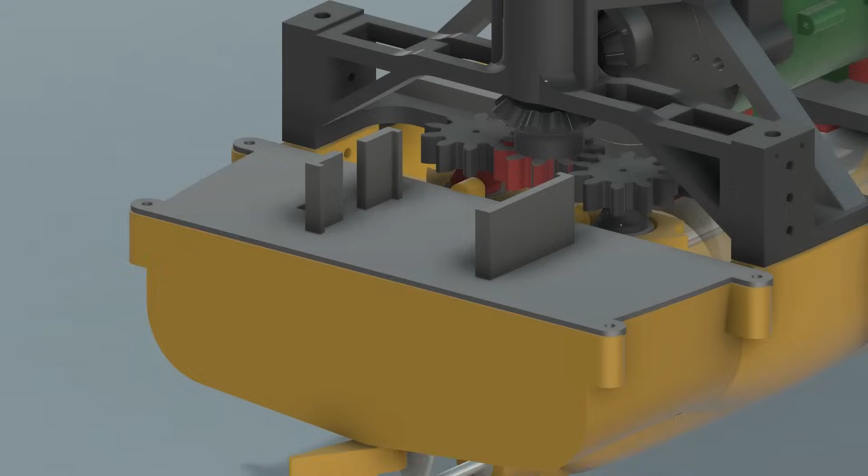I redesigned the hull lid so that the battery would sit on top and be held in the middle so that it wouldn't tilt to either side.

For the issue of the machine bevel gears scraping along the shaft, I then designed these small indentations in the shaft so that the set screw could sit inside them.

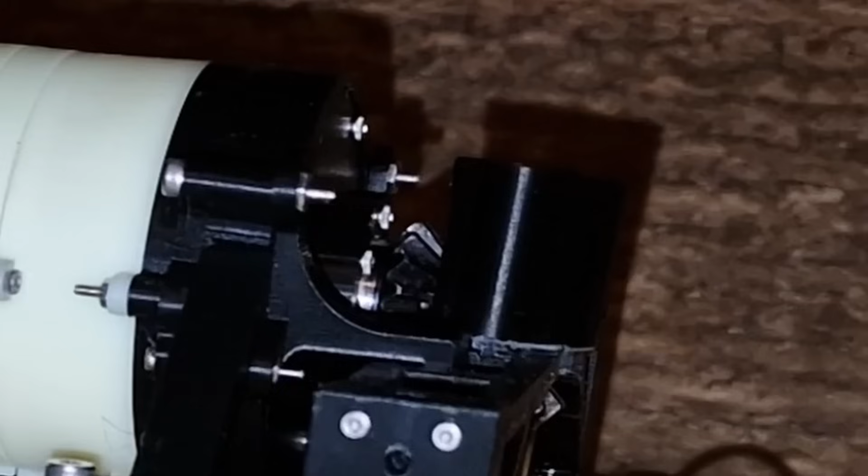After looking back at the footage with the bearing placed higher, I could see that it was skipping again because it was being pushed backwards, as it was not connected solidly to the mount. I tried to fix this by printing it as one piece instead of attaching it to the top.

Oh no! But once again, after winding it up to a certain point, it was just skipping gears.

So I never actually took this out to test because it was completely pointless. I think this is a pretty good time to call it quits for this boat, as it clearly needs a complete rework, and adding small pieces here and there to try and fix multiple problems just isn't going to work.